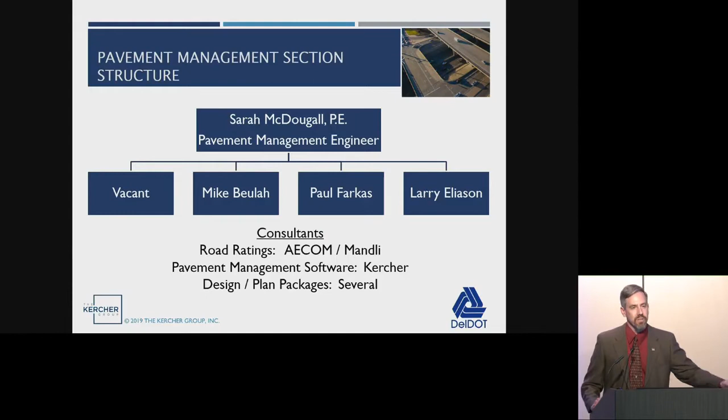Our pavement management software and the company that helped put this presentation together is Kercher. And then I started to list out the consultants that help with the design packages, and it got to be too many. So there's a lot of consultants that help put the design packages together.

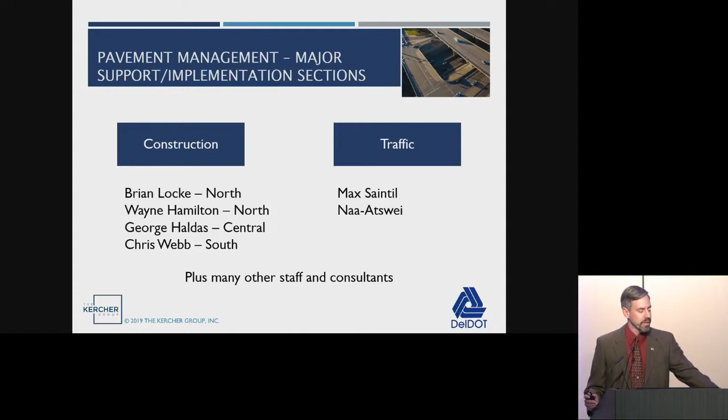Also, we have major support from a lot of different parts of the department, and I'm sure I'm going to offend somebody, but wanted to give some shout outs to the construction folks that implement these projects, Brian, Wayne, George, and Chris, some of which I saw here today. And in traffic, a lot of folks work on these, but particularly Max and Naa-Atswei spend a lot of effort on the signing, striping, signal plans for this large program. Again, there's a lot of other folks out there, but I just wanted to highlight some of the folks that are helping with this program.

So briefly, the overall pavement management program is broken down into these 5 main parts. The pavement condition and data collection, that's basically the road ratings. We do the road ratings for all the state maintained roads every other year. And then on the off year, we're doing the NHS, the National Highway System. That's part of our requirements to FHWA.

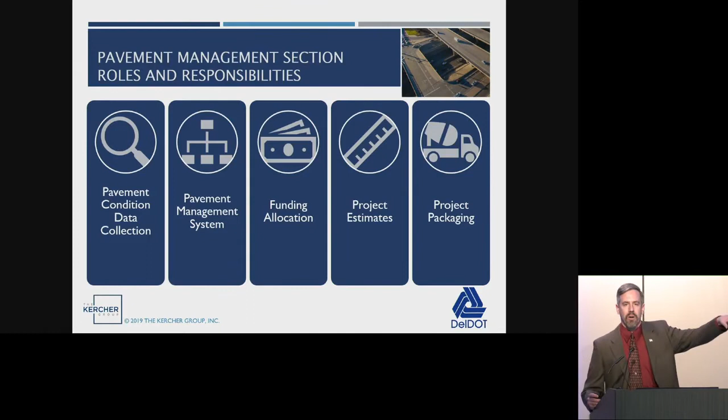In addition, and I'll talk a little bit more about the data that's collected there, but in addition to the actual road ratings of the pavement, it's also collecting the video data that a lot of us use for a variety of purposes, and it's also collecting the LiDAR data that went into the inventory that our planning division put together a few years ago. And every year, the road rating data collection is collecting the LiDAR data, but they're not necessarily processing it. So there may be things that we have raw data for that if you have money, we can work with the consultant to do some of the post-processing needed for that purpose.

Then there's the pavement management system, pulling in the data, looking at our funding and deciding what roads we're going to be doing what treatments on, and I'll talk a little bit more about that. There's obviously monies involved, and then developing the individual estimates, and finally putting out the actual PS&E, and then building the projects.

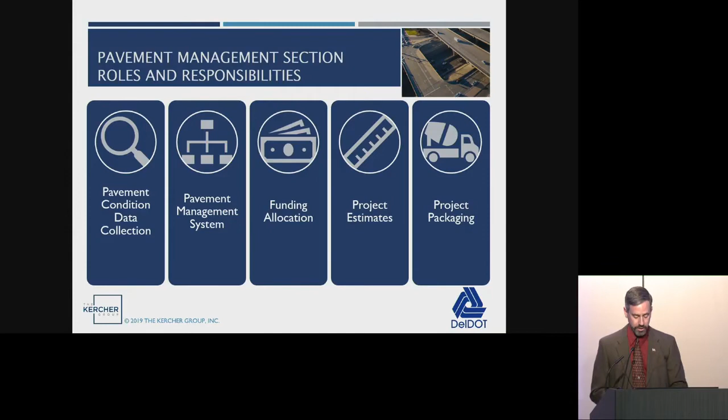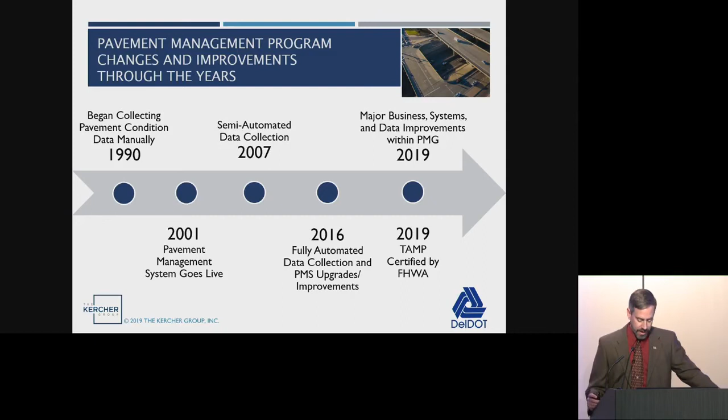The team did a lot of work on documenting standard procedures, development and finalization of a data dictionary that really well defines the pavement distresses, fleshing out some of the decision trees that go into, for the certain type of pavement and the certain distress that's found, what is the best treatment for those situations, and other upgrades like that.

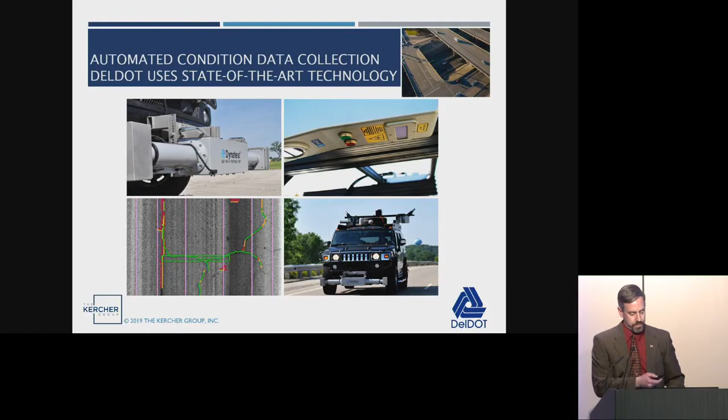So here's just some views of some of the automated data collection. It's obviously vehicle-mounted equipment. We get imagery, we get camera view, we get LiDAR, we get this laser crack measurement system. The main thing that it's looking for is the location and the width and the depths of the cracks. For now, it's all looking at surface problems. Again, the width and the depth of cracks.

We are looking at the possibility in the future of doing some ground penetrating radar to understand better what's underneath the surface. But as of now, it's all surface.

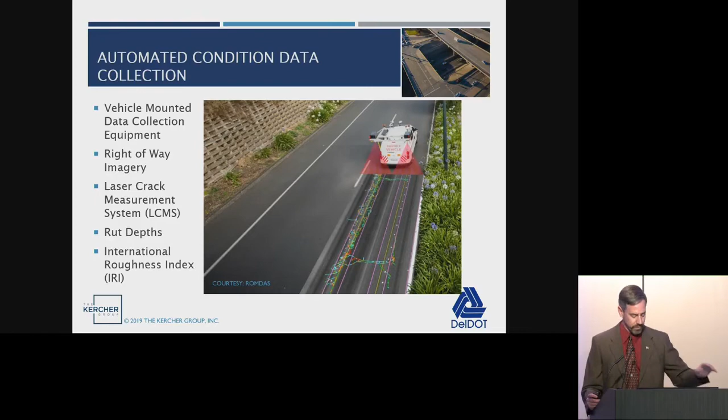So for the overall pavement condition, if that score is greater than 60, then the pavement's considered good. If it's 50 to 60, it's fair, and if it's less than 50, it's considered poor. And again, depending on the types of distresses and the types of pavement that you have, whether it's asphalt, composite, or concrete, the system helps us decide what kind of treatment to do on those roadways.

I was going to talk a little bit about our actual overall ratings for Delaware, but I thought it was just going to get too confusing because there's two different rating systems. There's our Delaware rating system, and then there's the federal rating system, which don't line up exactly. The federal system really focuses on the national highway system, so that's only a subset of our roads. We need to worry about all of our state-maintained roads.

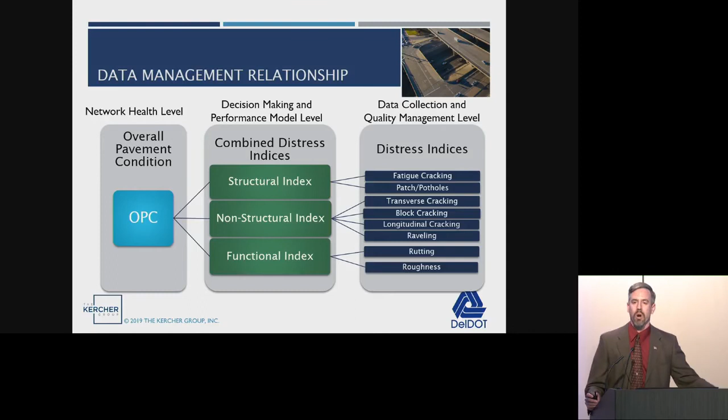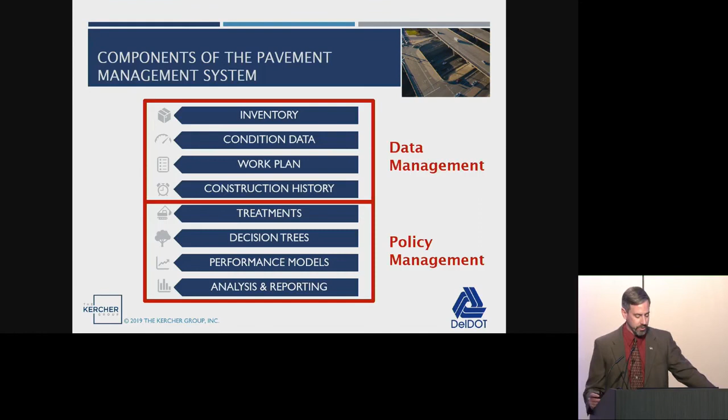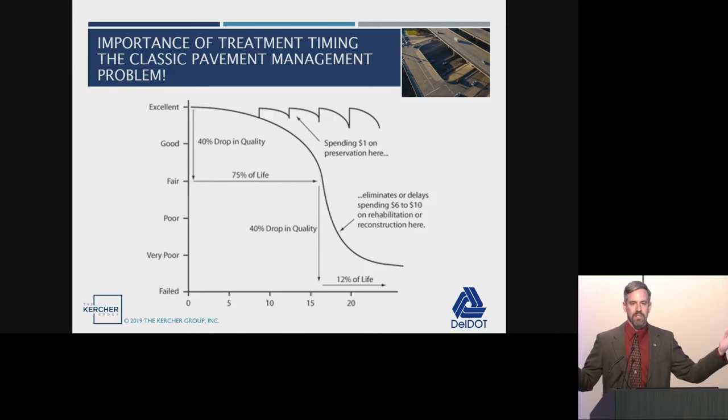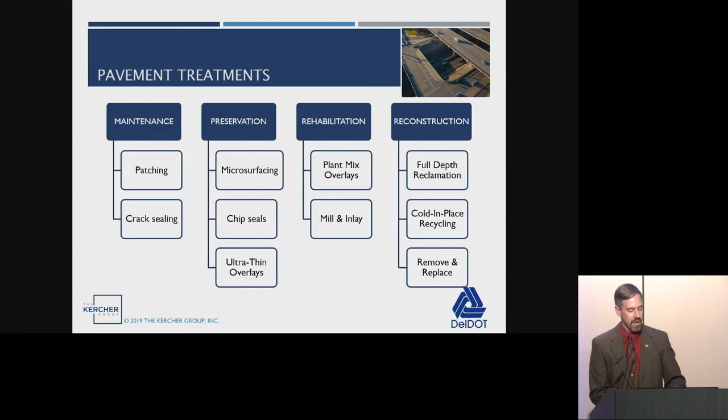Here's an example of some of the treatments and kind of how we categorize them. So our friends in maintenance are using the patching and the crack sealing and the day-to-day, and they're dealing with the complaints, and they're doing the regular maintenance on those roadways. Then we have the preservation techniques. We don't do a lot of microsurfacing anymore, but still doing the ultra-thin overlays and chip seal type treatments.

Then the rehabilitation side is what most people would think of as the pave and rehab, whether it's a pure overlay or the mill and fill type of job. And then we get into the full reconstruction. So a lot of you in this room, I'm sure, were involved in the 141 Center Road reconstruction. We did 113 down south a couple years ago, and at some point, no matter how much you do the preservation or the rehabilitation, you're going to have to fully rebuild these roadways.

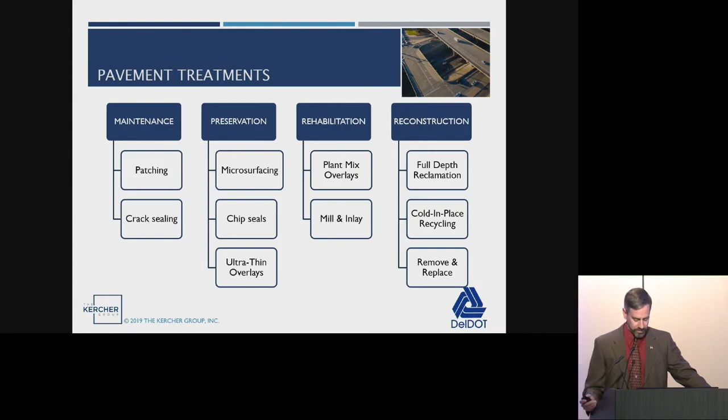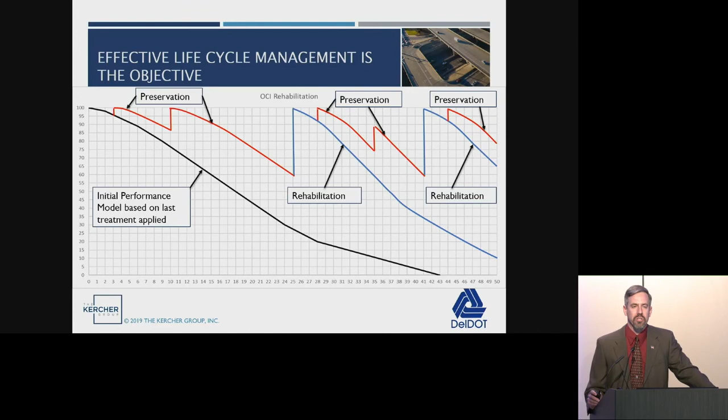With that, just kind of wrapping up with the pavement management budget. I think Shantae mentioned it in her presentation that this is one of the biggest, if not the biggest, program that the department delivers every year. This fiscal year, 20, just like for the department as a whole, this program is going to be spending over $130 million, a combination of state and federal money.

At least as of now, with where our budget looks to be in FY21, there's a big drop-off, and it stays low for the next couple years, so we'll see how that goes. Obviously, projecting out future funding is a challenge. We need to tie in big projects like the viaduct project, and how that's really going to take a hit out of our budget, as well as all the other capital projects that we're doing.

And so the interesting thing to me is that, coincidentally, both pavement management and on the bridge side, we're going to have updated performance models ready probably early this year. And we'll be able to project out more accurately what the performance is going to be over the years given our budgets. So once we take a look at that, I think we'll probably have some high-level discussions about, are we putting the right amount of money into these programs, or does it need to be more, or does it need to be less?

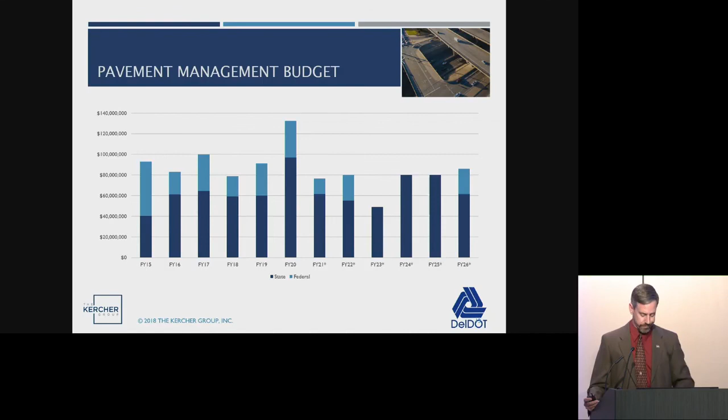So that is it for me on that one. Any questions? All right, hopefully under 15 minutes on that one.